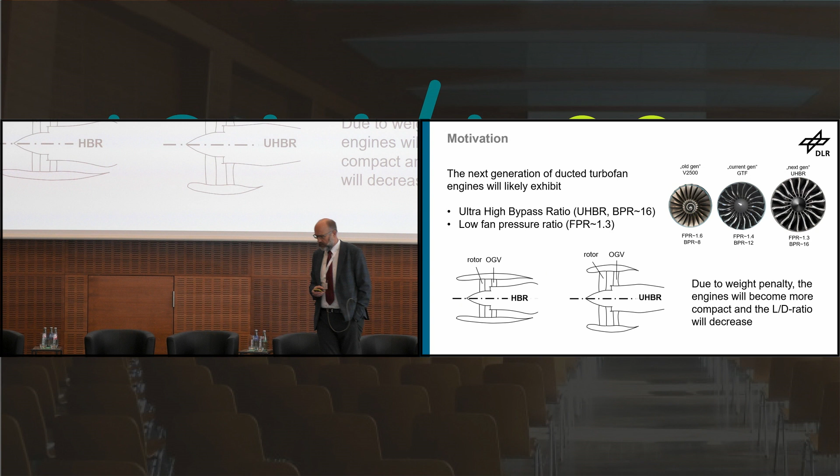Let me start with propulsion systems. I have to pour a little bit of water into the wine, as I'm not going to address every propulsion system. If I would do so, I would need 5 hours. But what I'm going to talk about is the ducted engines. I will show you an overview, and in the second part of my presentation, I would like to focus on electrification and propeller propulsion. What is the motivation behind all that?

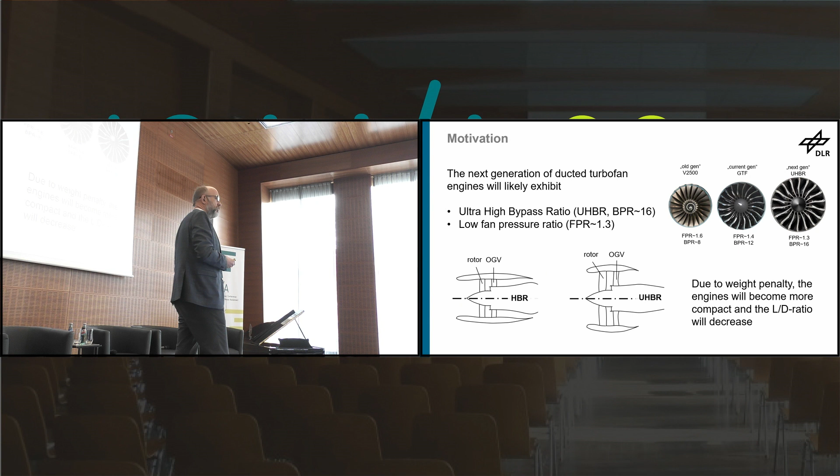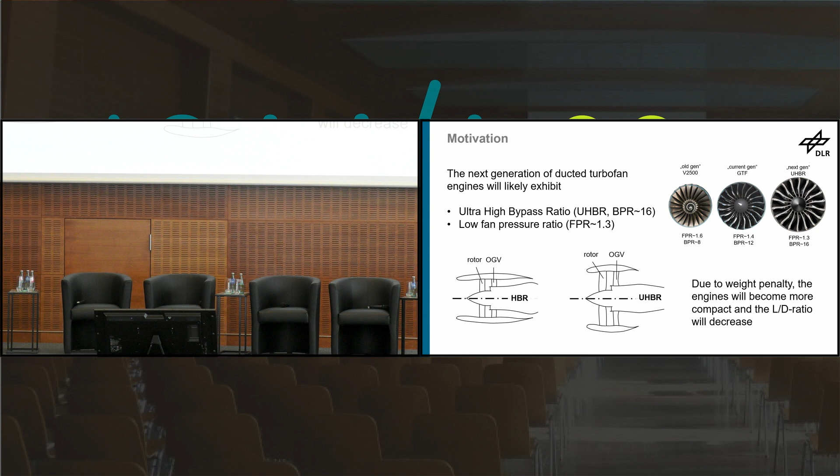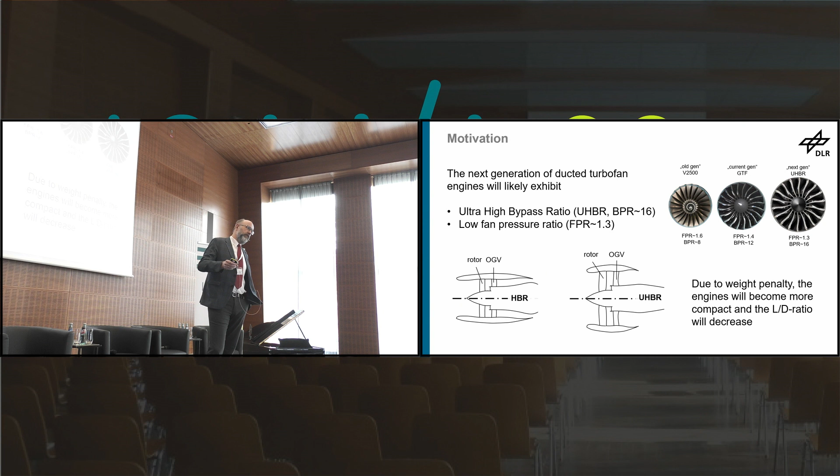Those who watch the development of engines have probably noticed that the engines are getting bigger and bigger. How come? Well, the so-called bypass ratio, and we heard about that yesterday, is increasing. It's getting higher. And this means we have a lower fuel consumption and less noise at the same time. And we're still arguing, but in a positive way, what the optimal point is. In the past, people said bypass ratio 10 is the limit. Now it's 12 already. And yesterday we learned that 15 is being developed. It's being tested, and we assume that when it comes to the ducted fans, even a bypass ratio of 16, 17 is possible.

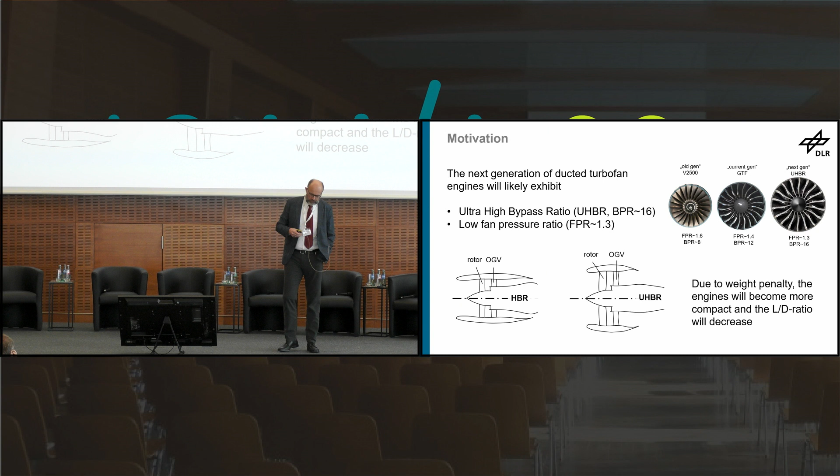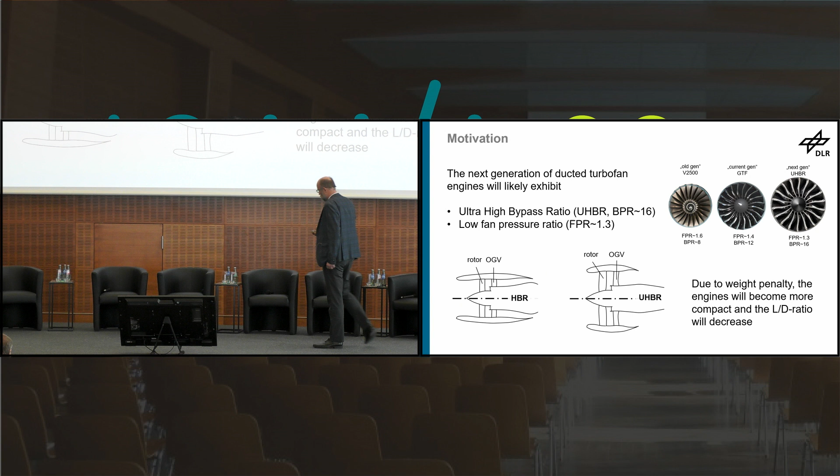So here you can see the current generation and the next gen with a bypass ratio of 12 and hopefully one day 16. So this is the airflow passing the engine. And next gen, as I already mentioned, might have a bypass ratio of 16. Here you can see that the engines have changed in their design, in their size. This was also mentioned by several speakers. They're getting bigger, heavier. It's very difficult to assemble them. And why are they getting heavier? Well, they're designed in such a way that the nacelle is a little bit shorter and more compact, which means the length-diameter ratio will decrease as a consequence. And that's how we will get more compact engines.

In the first part of my presentation, I'm going to focus on the following question. What kind of impact does such a new compact engine with a short nacelle have on fuel consumption? And what kind of impact will it have on noise? And what about the long-term benefits? And in the second part of my presentation, I would like to talk about electrification. I would like to talk about certain things which can be used to reduce noise, and I would like to talk about these smaller engines which might be an option for the future. Of course, I'm going to address the linings, which were also mentioned on several occasions yesterday.

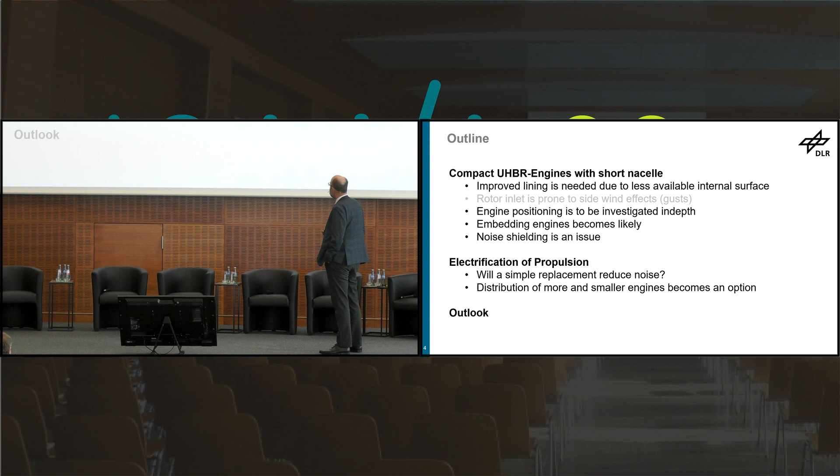And here it is important to see, but I'm going to address that briefly, I don't have the time, that these kind of shorter nacelles are also quite susceptible to lateral wind. So if the wind does not come from the front, but laterally, you have to expect the engines producing more noise. And this is something you have to be prepared for. And then we also have to address the engine positioning. And how is it assembled? I mean, you have to integrate them to the fuselage. You have to make sure that the landing gear is not getting too big, and shielding needs to be guaranteed at the fuselage. This is something which is, of course, key when it comes to the design of future aircraft.

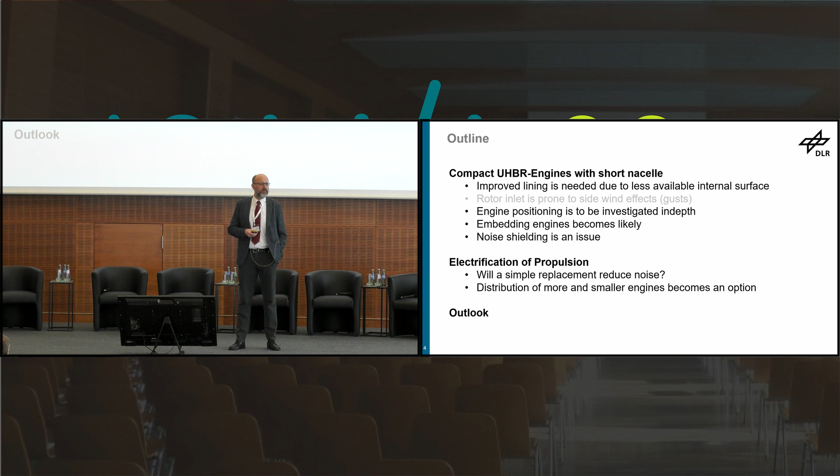Electrification is something which aims at replacing current technologies in order to reduce noise. Let me ask you, who believes that electrification might have a positive impact on noise? Hands up. Who believes that electrification of propulsion will have a negative impact? I see some of you are quite hesitant, not sure, but we will take a deeper dive into that to

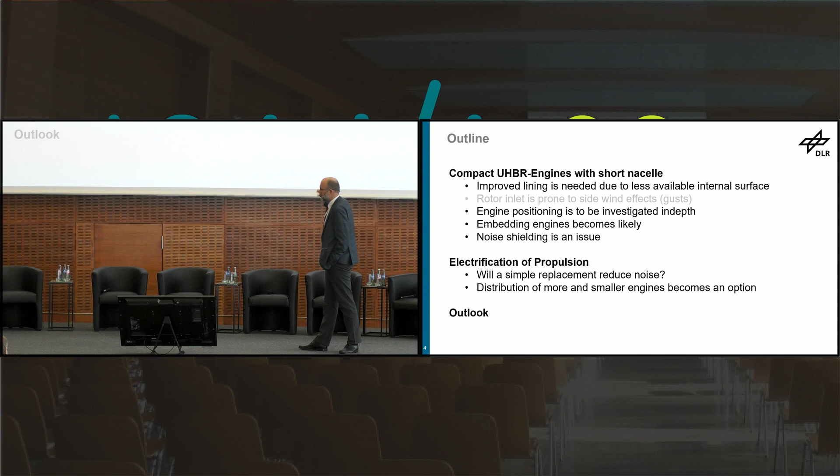answer that question. And electrification, of course, will bring new design options along, and I'm going to talk about that in a minute. Let's talk about lining of engines. You can see they're getting more compact, and as a consequence, we need, of course, space for the lining. And this kind of lining is being used at propulsions, at engines, which brings the best benefit, which means we have the noise source at the engine, and before the noise leaves the engine, it's being shielded by these kind of linings. We have a dramatic reduction.

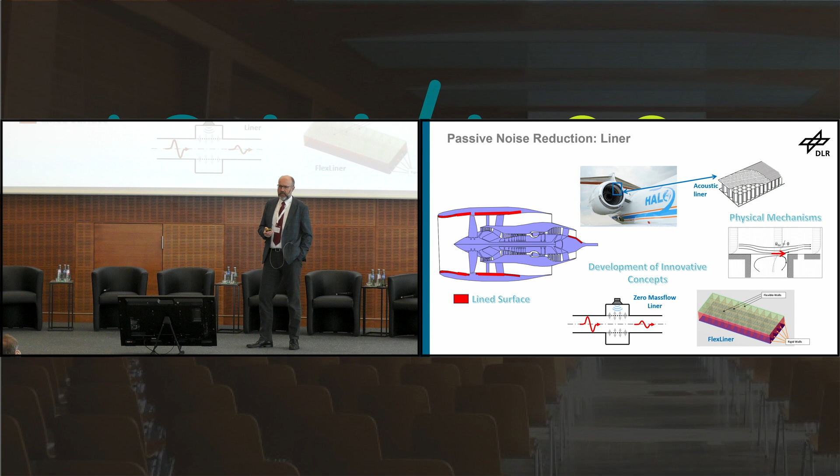You can see that these kind of liners are very flexible, and we can use them more often, not as loudspeakers, as you can see it here in the center, but having resonators, for example, in order to absorb the noise to a large extent. And I'm a fan of liners, and you should also be huge fans, as they reduce engine noise a lot. So this is why we have to invest many more thoughts into the development of new liners.

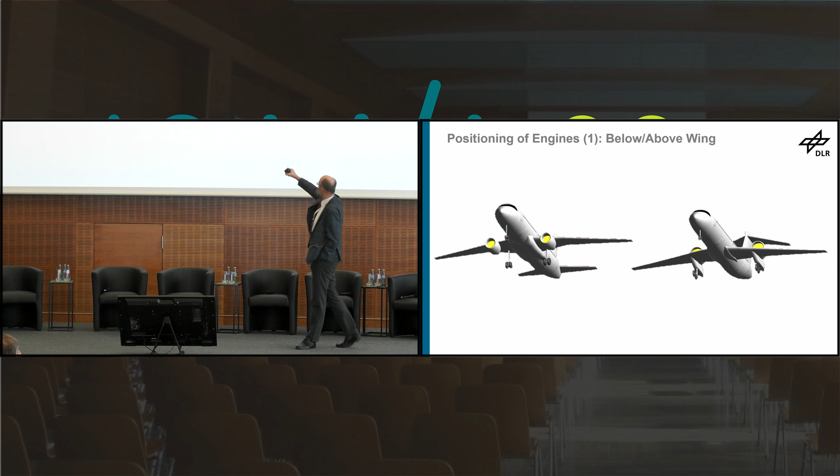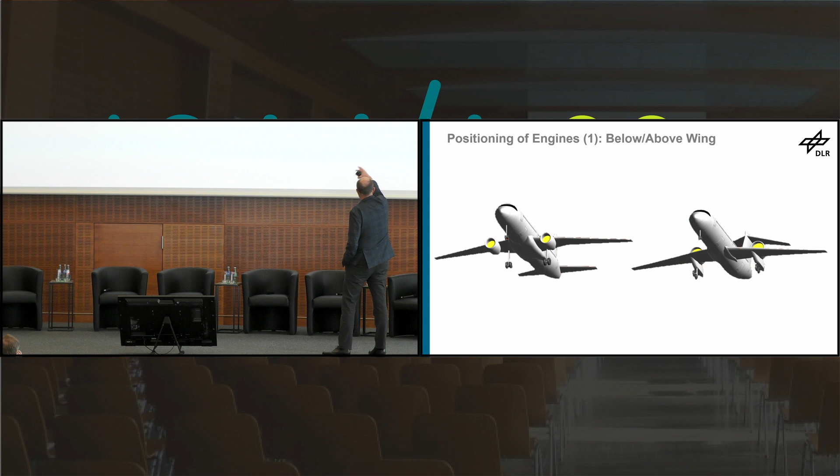And here, a few words about the positioning of engines. Here you can see an A320. The engines are mounted below the wings. This is typical, the usual way. But if they get bigger, you need to make sure that you have a certain distance to the runway, and before making the landing gear even higher, to have the distance guaranteed, and we know that landing gear is of course a source for noise, we can mount the engines in a different position.

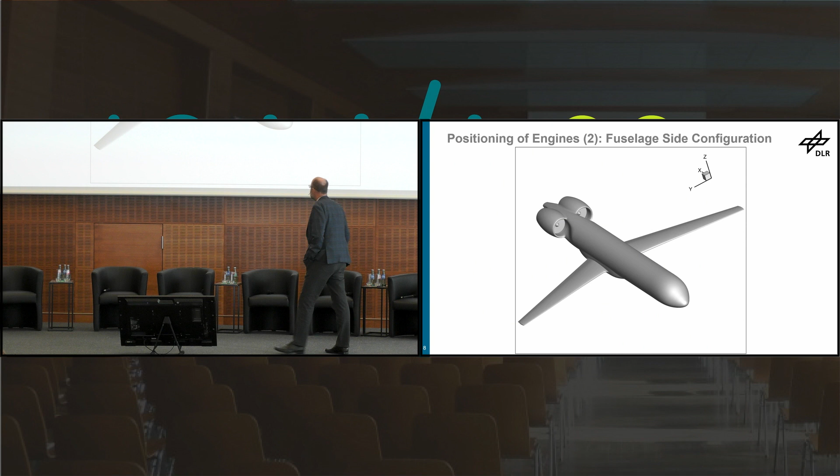And on the right hand side you can see one example. On top of the wings, with that T structure, or embed the engines into the fuselage. So there are different options, you can see them here. Here we have the engines in the back. We can also move forward, and as far as the drag is concerned, it is also quite positive, and we can also see positive impact

on noise. So we analyzed it, and we learned that the fan, which is rotating in the engine, is of course causing noise. We have different flow scenarios, as due to the other embedding, we have a slower speed in the engine. And this kind of flow leads to specific noise. We have more noise deflection, which means this kind of boundary layer ingestion, which is of course positive for certain aspects, might have a negative impact on noise.

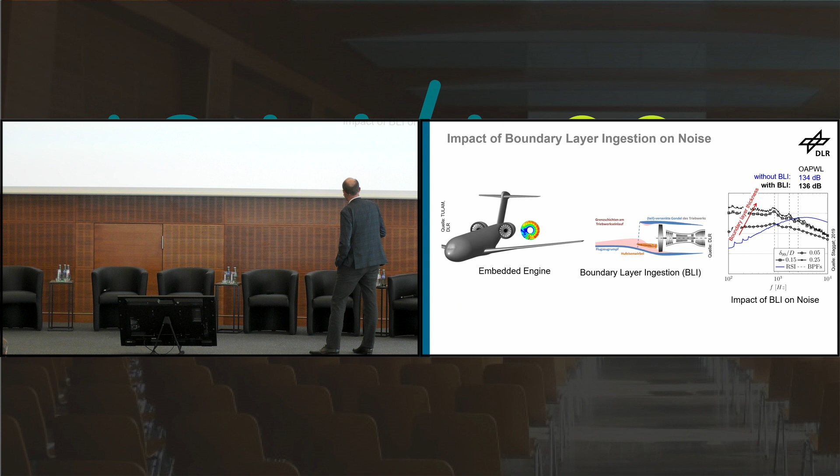And this brings me to the exciting topic of electrification. We're still quite far away from a proper electrification. This is what we learned from the Bauhaus colleagues yesterday. However, there is a lot of research being done in order to save fuel and, of course, to reduce noise. And this is why lots of you are probably thinking of buying an electric car. And the same goes for planes.

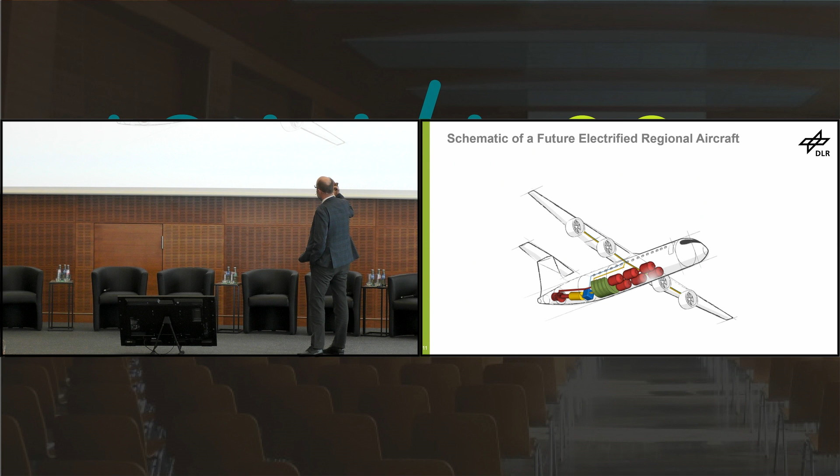Let me invite you to take part in the following experiment. So let's assume it all works. We have this plane here, this aircraft with 4 engines. And we have a hybrid engine. You can see in the back the gas turbine integrated in the fuselage, driven by sustainable aviation fuels, and the generator generates electricity, and this electricity is now powering the engines mounted under the wings. So, assuming that the gas turbine is shielded very well, what kind of noise can we expect? Is it much quieter than the original, the ordinary plane?

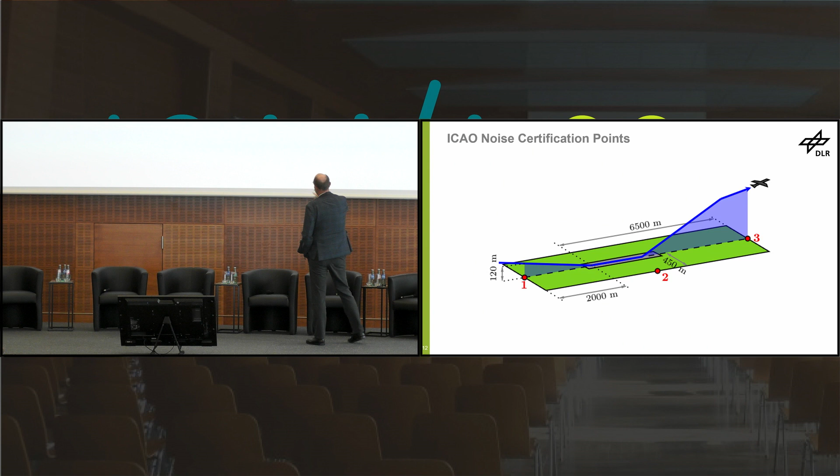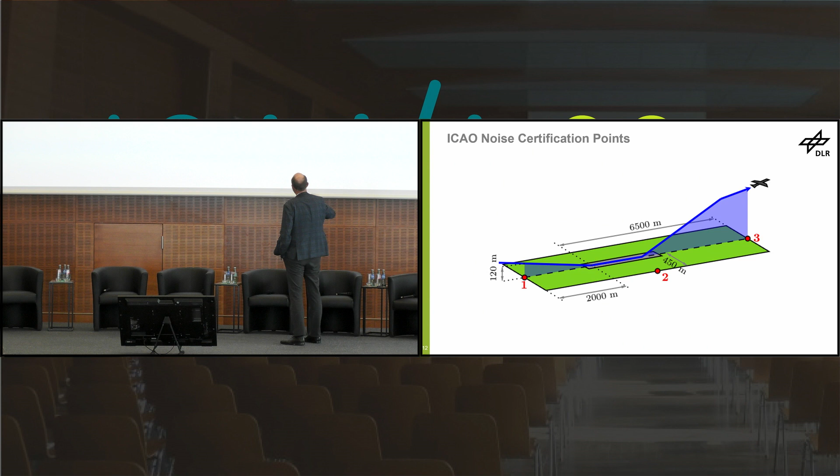This brings me directly to the noise certification points. You can see 1, 2, and 3. 1 is the approach point, 2 is the sideline point, so this is where the airplane drives at full thrust, and 3 is then the departure point. And for all 3 points, we analyzed the noise sources and the way they change.

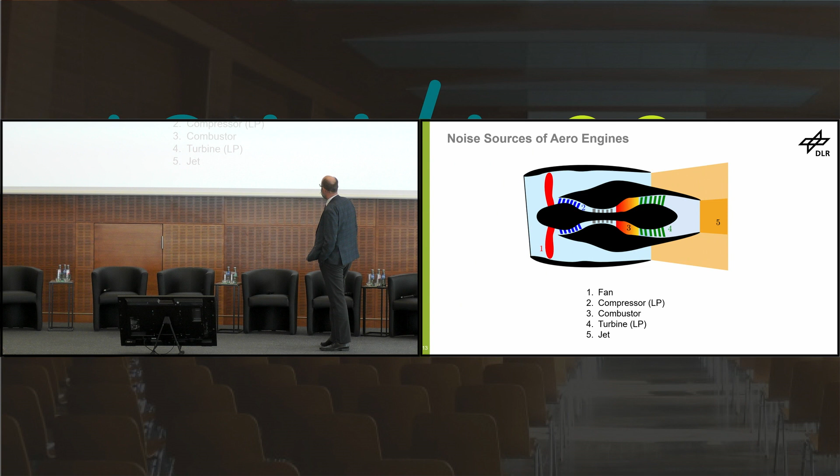And the prerequisite is electrification. And here you can see once again the engine, which was also shown to us by the 3 TU Darmstadt representatives. You can see the noise sources: the fan, we have the compressor, the combustor, the turbine, and the jet.

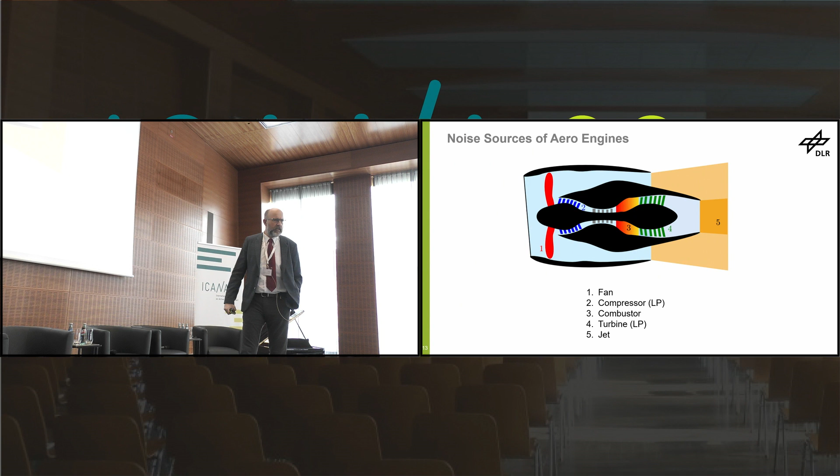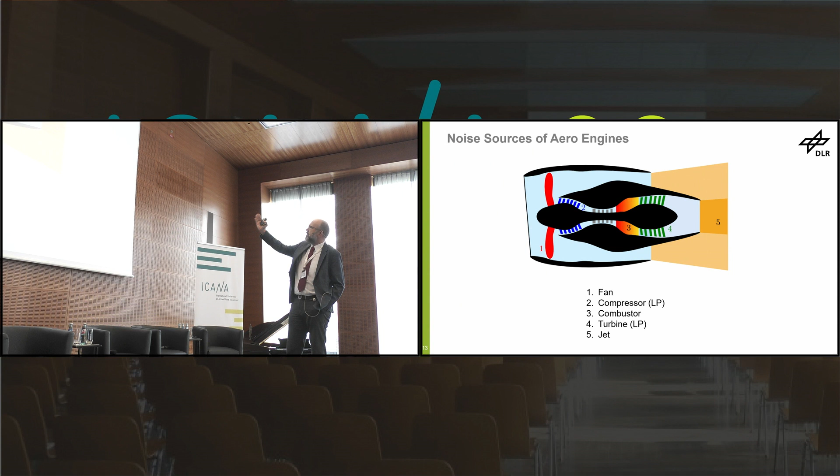And if we electrify, what kind of components are no longer needed? Well, the compressor is no longer there. You do not have to condense the air to burn it later on. The combustor is gone, the turbine is gone, and the jet is also being dramatically reduced. What is in the center, what is dark, we will no longer need either.

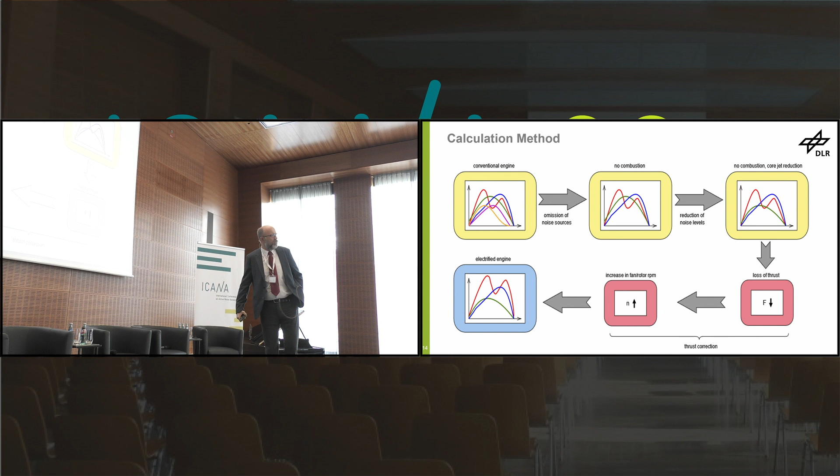And this is the calculation method. We created a database and gathered all the data of the different components of an engine. On the left-hand side, you can see the conventional engine, different curves representing the 5 main noise sources: fan, compressor, combustor, turbine, jet.

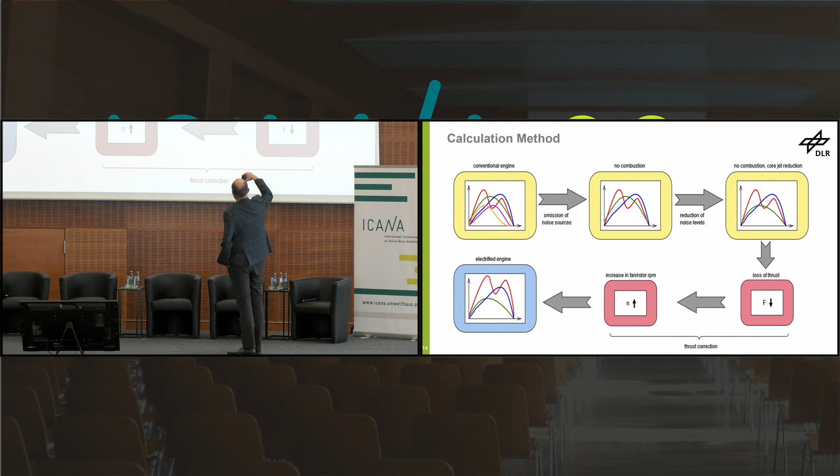Then we took out the combustion, we reduced core jet noise, and then we learned, okay, it's not fair because the jet is also causing some thrust, and we have to compensate for that, which means the lost thrust from the jet needs to be compensated for. And how can that be done? We leave the fan, and the fan rotates a little quicker, which means more thrust from the fan, and this thrust loss was compensated for.

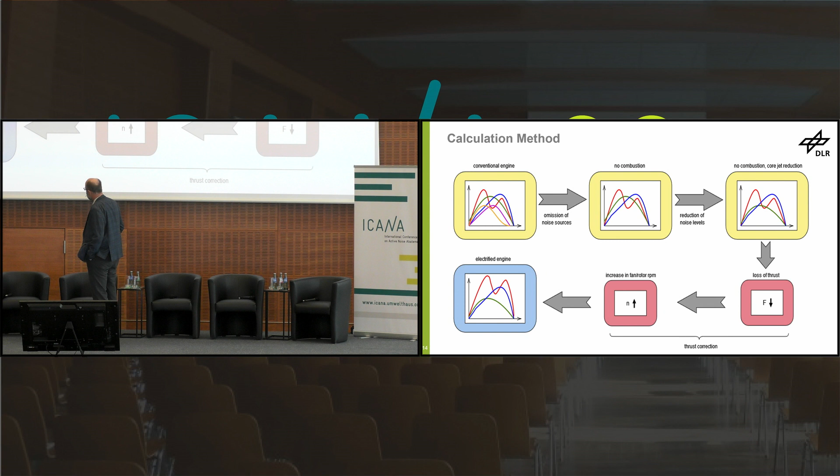We increased the RPM, and this is a high bypass engine, and 20% come from the jet, 80% come from the other source. We had to compensate for that. And as a result, we had this electrified engine highlighted in blue here. And now let's take a look at the results.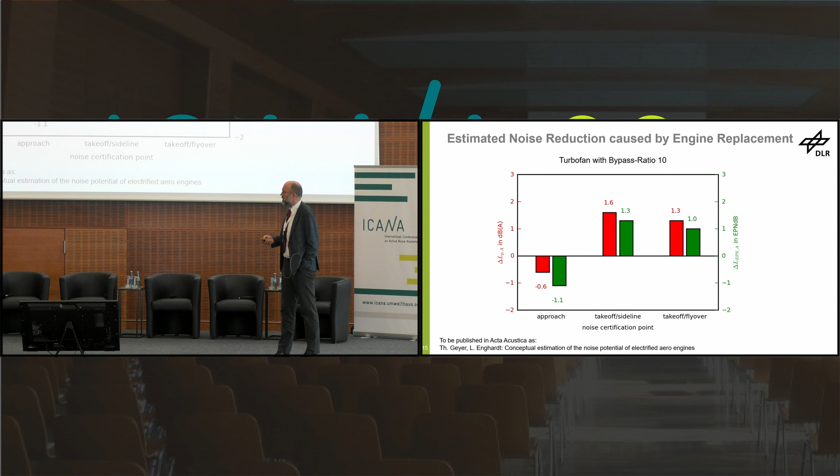In the takeoff sideline noise certification point, the electrified version is quieter, and the same goes for the takeoff and flyover noise certification point. But we're not talking about 10 dB. It's not that much. So the benefit is not that big. If we took 2 engines and electrified them, keeping all the other technical aspects apart, then it wouldn't lead to a dramatic noise reduction. The planes wouldn't be that much quieter.

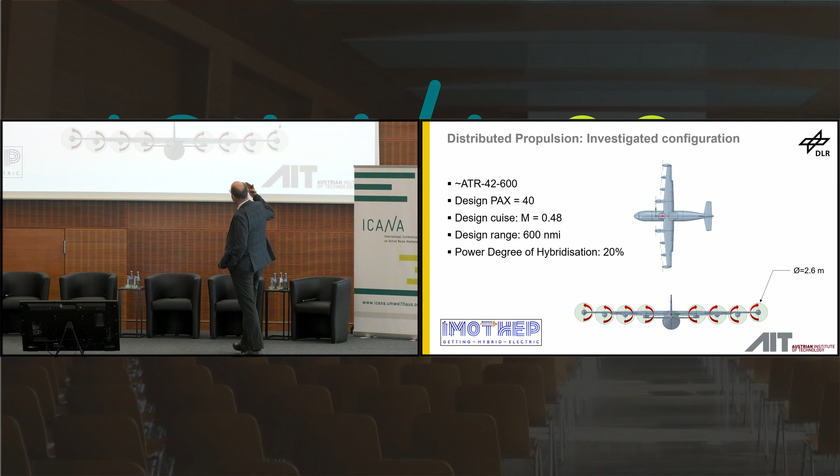But what kind of benefits will electrification bring? Well, we can choose different configurations. And here you can see, for example, distributed propulsion. This is a configuration which was used for an experiment, the ATR 42-600, which means on every wing we have 3 additional engines, and we have a hybridization, which means the standard engines will remain, but they will be used as generators and will power 3 additional turbines, which means you have 4 propellers on each and every wing. You can see them here.

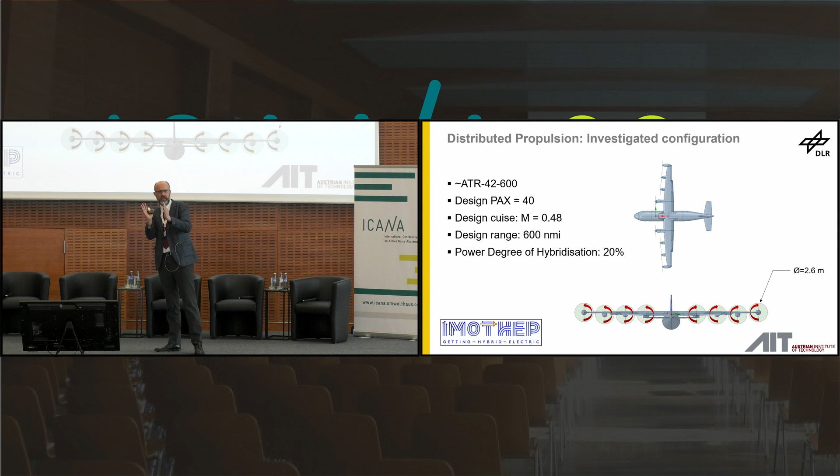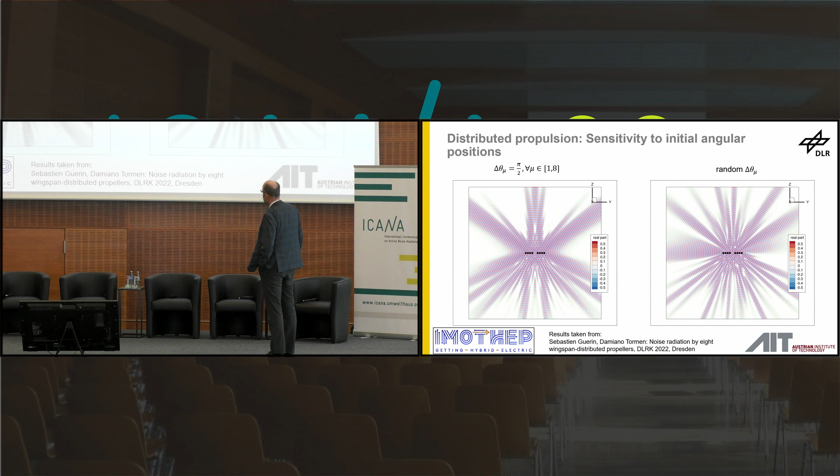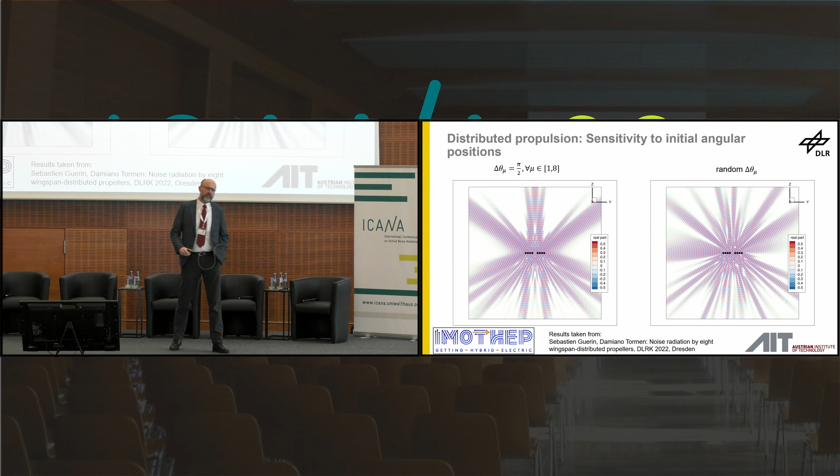On the left-hand side, you can see all the engines are used in synchrony, simultaneously, and on the right-hand side, they're operated randomly. And you can see that the noise radiation looks completely different. As a consequence, we have learned that it's much more complicated, and of course you can profit from additional engines, but how to operate them is quite complicated, and how to get to these white zones where we have low noise radiation definitely needs more thought. So operating them is being further researched.

But this brings me already to the outlook, which is a longer one today. You might know that everybody's talking about air taxis at the moment, and why am I mentioning them? The air taxis or the airport shuttles have one benefit.

They look aerodynamically perfect, and you will get all kinds of concepts and architectures. So all kinds of designs seem to be possible. If you take a look at them, it's fantastic, at least fantastic to me. And I'm somebody who loves the design of planes, and it's great to see that we have so many different architectures. And if we have so many architectures, we also have so many configurations, and so many different designs are being tested at the moment.

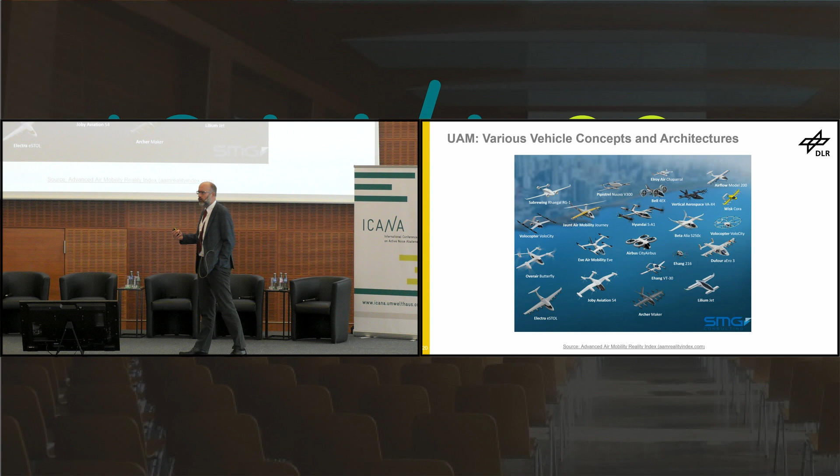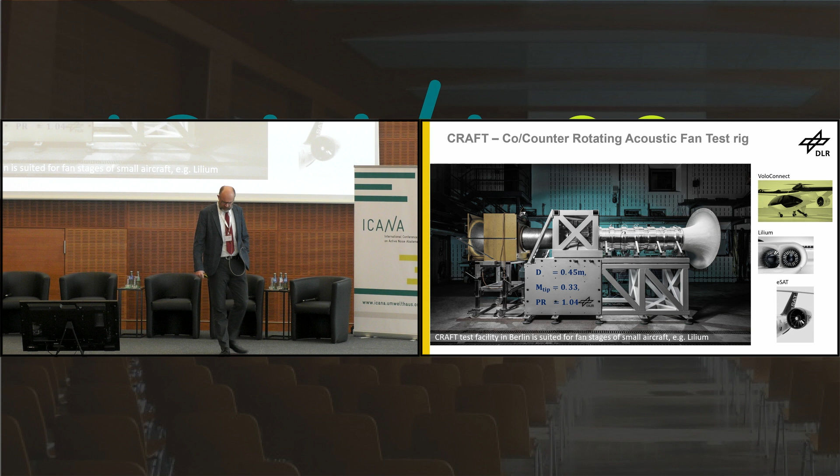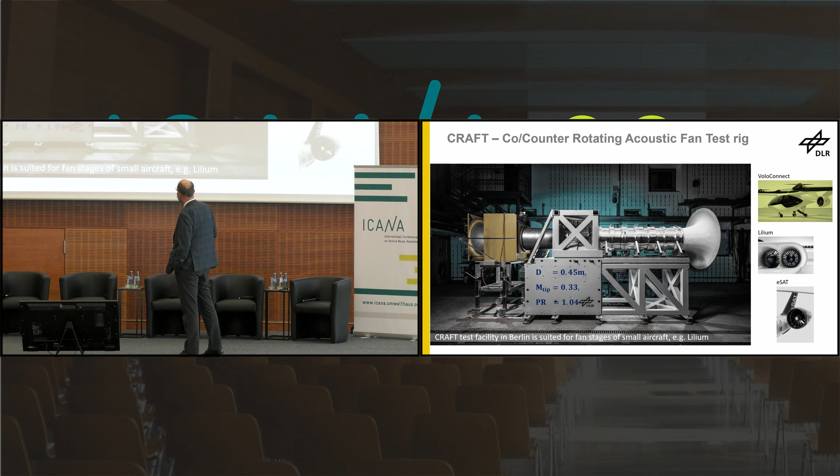And therefore, we're quite optimistic that one day we can profit from testing these designs when it comes to building big planes. So having these kinds of different vehicle types might have a great benefit for bigger planes. We can measure, for example, the noise they are producing, and we have quieter ones, louder ones, and we can learn from them. And some of the designs, as I already said, might be passed on to the bigger ones. And we are, for example, testing smaller lined engines. This is why we started with a new test facility in Berlin, which is suited for fan stages of small aircraft. So we can do quite a lot of experiments here.

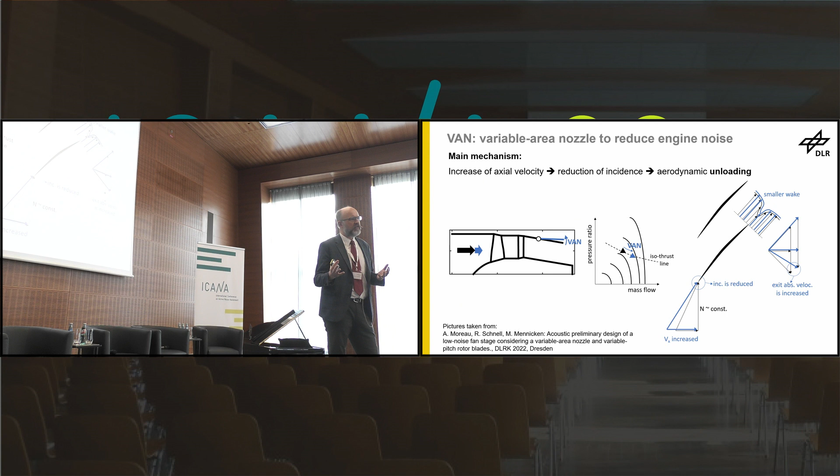Further options. What has been done already, what works well, and what might be beneficial for the noise radiation. Here you can see the variable area nozzle to reduce engine noise, which means the pressure which operates on the fan can be changed in a variable manner. Why is that important? Especially when you're approaching, the engine is not operating on a design level. I mean, the best performance is always given when flying high. But when approaching, the engine is not working in an optimal manner.

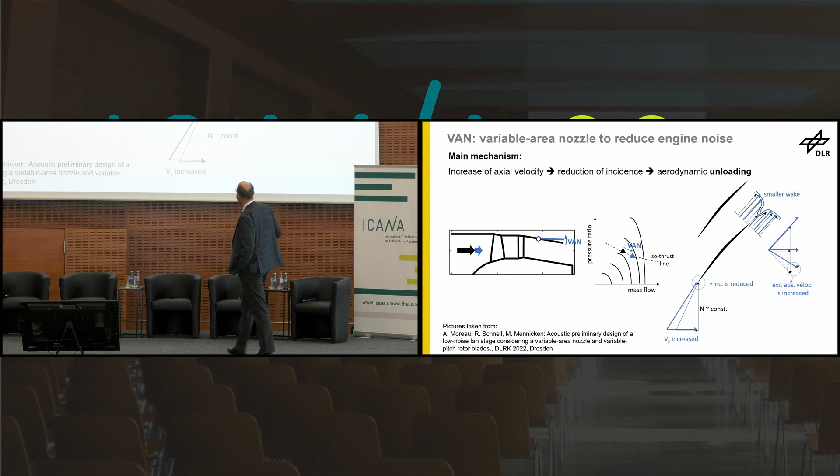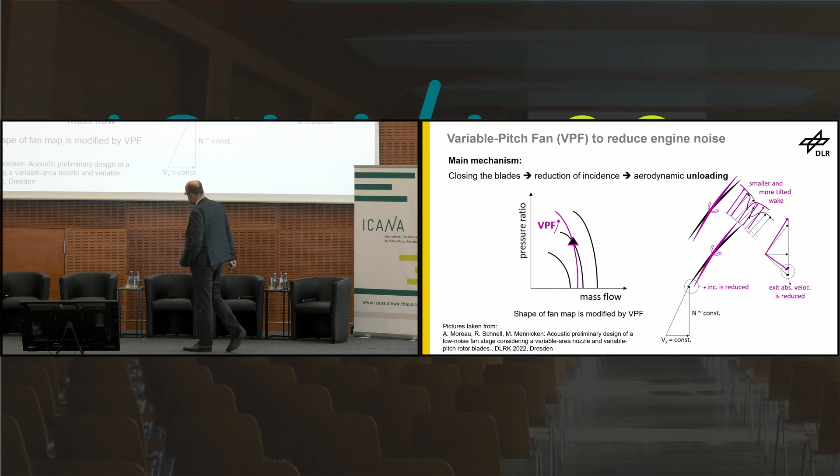And this is why we found out that increasing the axial velocity is reducing the incidence and is then leading to an aerodynamic unloading. And this is something which can be used for propellers, something we have in the system. And by varying the nozzle, we can have, for example, a positive impact. So these are two options we have analyzed, and we can see a huge benefit which is possible. And here you can see the detailed information on the paper I'm quoting.

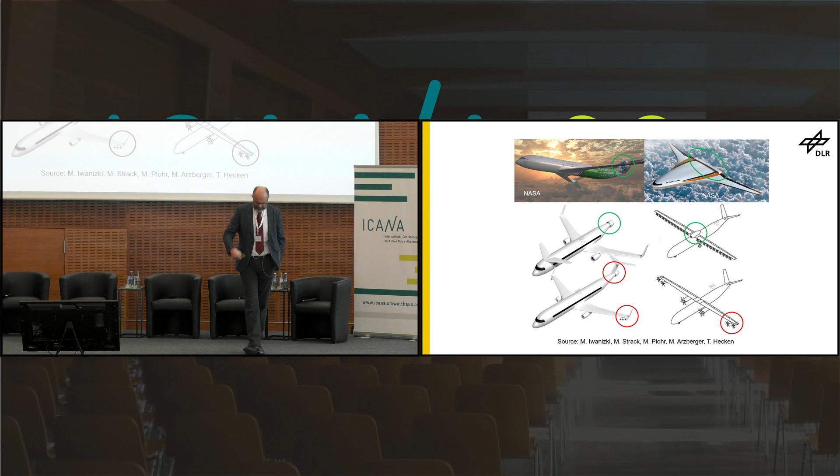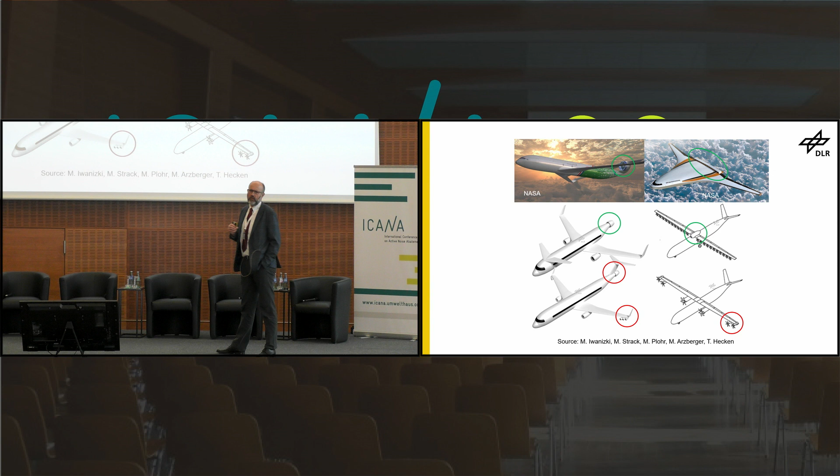And you can see that there are configurations which are really good for the performance, but produce more noise, highlighted in green and red. But in some cases, it's only a gut feeling. We need to take a closer look at it. So it's a trade-off between fuel consumption and noise. So how can we find a good compromise which leads to lower fuel consumption and less noise at the same time? Let me summarize that.

When it comes to future ultra-high bypass ratio engines, what is happening? Well, they're getting more compact, and this is why the length-diameter ratio will be reduced as a consequence, which means less space for the wonderfully noise-reducing technologies we have with the lining, for example. And this is why we definitely need to improve that.

The engine positioning is, of course, a very important topic. Where should I assemble them? And if I assemble them, I have to make sure that I profit from all kinds of technical parameters which are known to us. Embedding the engines is likely to increase fan noise, so this is negative. But we have the variable area nozzle and the variable pitch control. This is something which can definitely have a positive impact on engine noise.

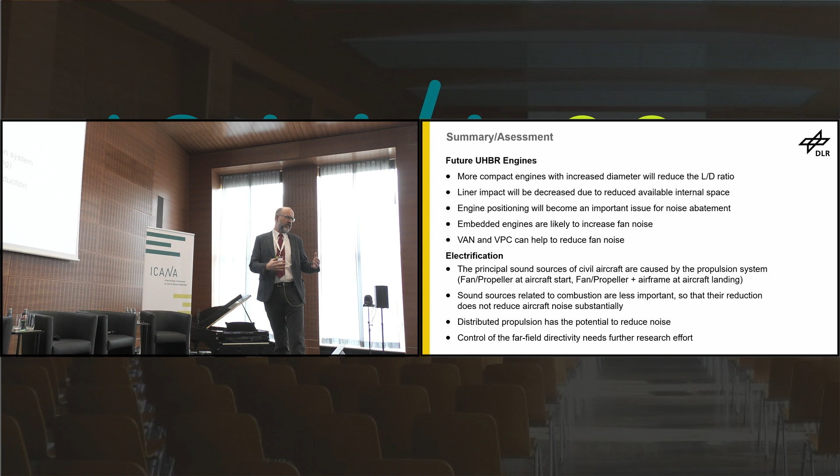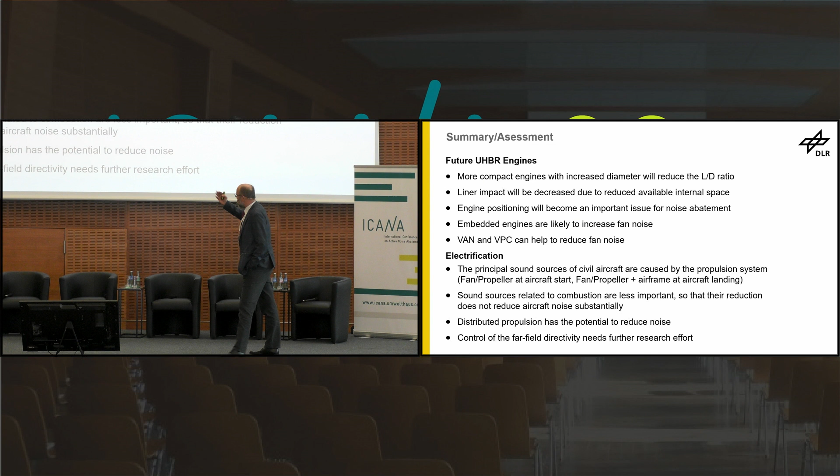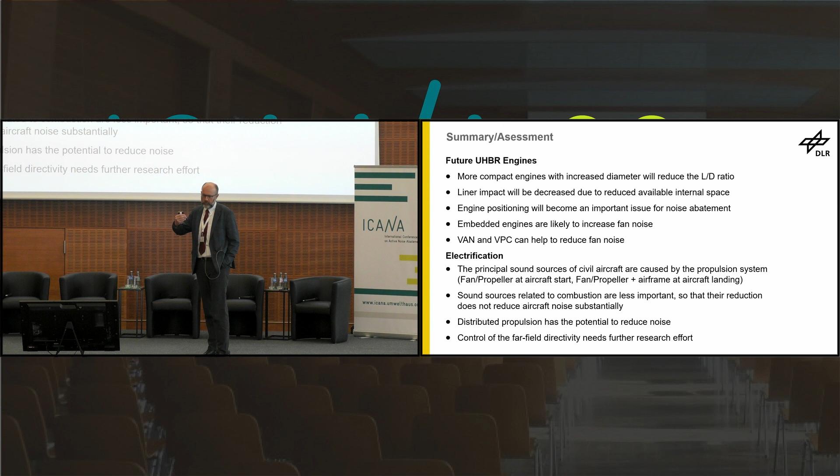When it comes to electrification, however, simply replacing the engine will not lead to a dramatic decrease of noise. Effects could be seen, but not significant ones. And noise sources which have combustion as a technology are not the main sources of noise. The distributed propulsion systems have a great potential to reduce noise, and this potential can be seized if you do the right thing.

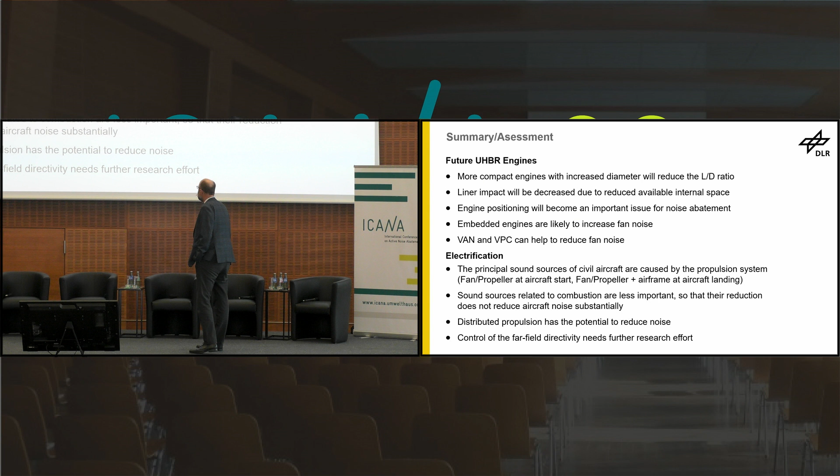And finally, I'd like to say that a lot more research efforts need to be made. So this is my conclusion. We can see lots of changes for the better when it comes to engines, but still we have to do more homework. We are monitoring the market very thoroughly. We're watching what is happening from the technical point of view, and we're also monitoring the air taxis to learn from them. And in the years to come, we will see very exciting and interesting developments when it comes to electrification, for example, and other technologies. But of course, you simply cannot exchange these kinds of systems and hope that everything will be quieter overnight.